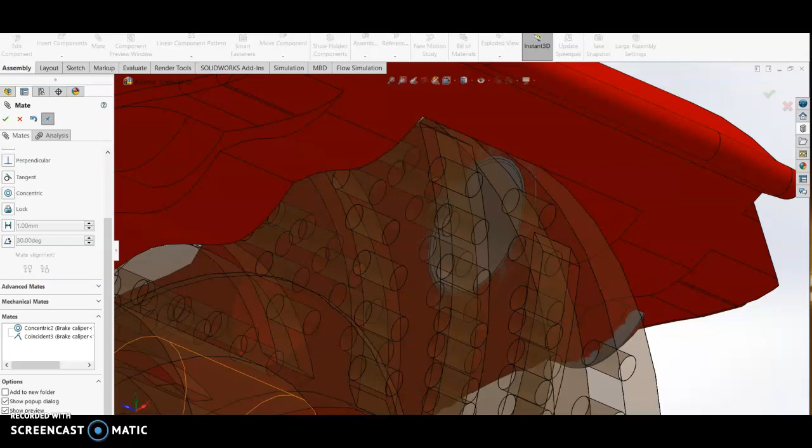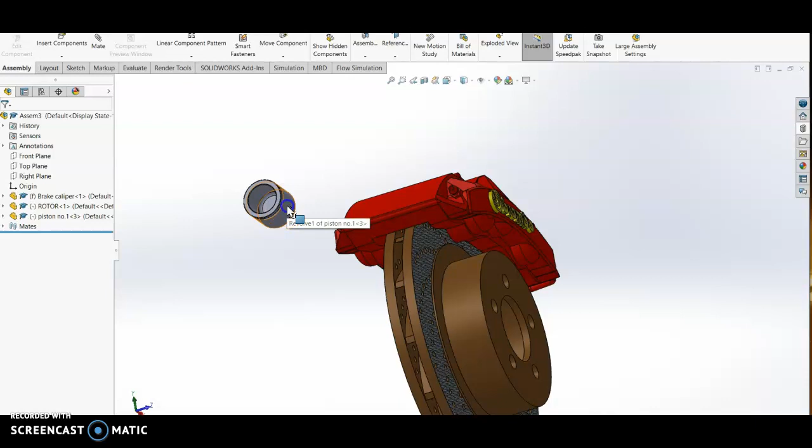We are going to install the piston into the caliper. So we have to insert the component. So we do it one by one. So first we do piston number 1, open. So piston number 1 is the biggest. Now we can duplicate this one by pressing Ctrl and then click, and then it's already duplicated.

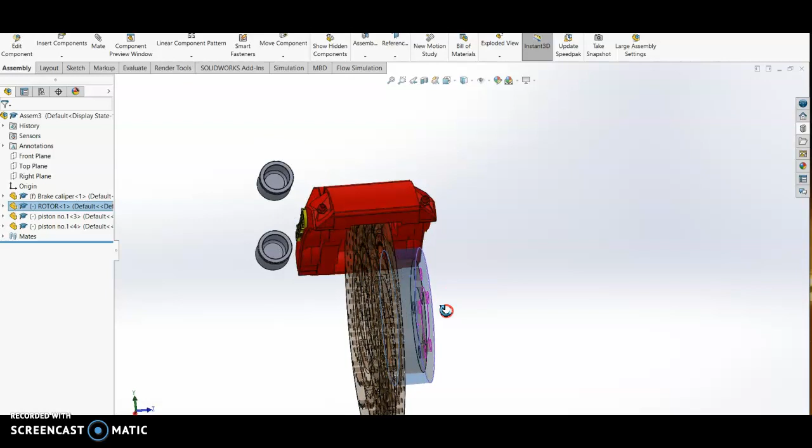So this is the front. So this is the big piston. In order for me to select the inside, I can make this one transparent or invisible. So I just click this side. So now it is invisible. So I can now select the base and then mate, and then to the cylinder.

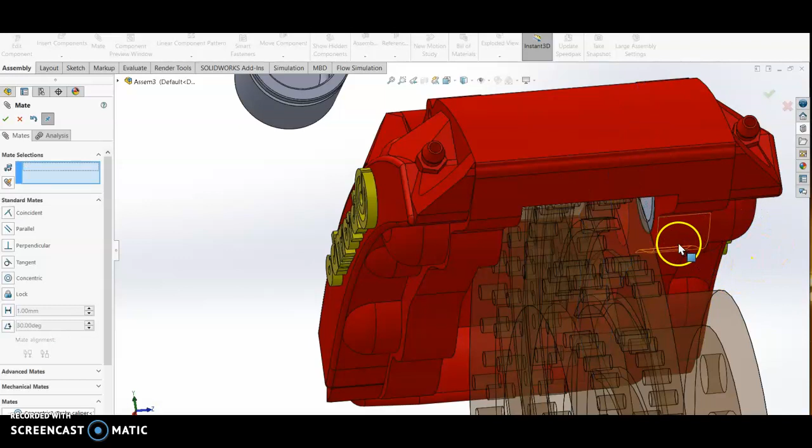So now see the position is correct, concentric. Okay, check. So now this base and this base will also be coincident. So check. So piston number 1 is in already, and then piston number 2, or still number 1 but on the other side. Okay, select, and then we make it concentric. So make sure that the position is correct.

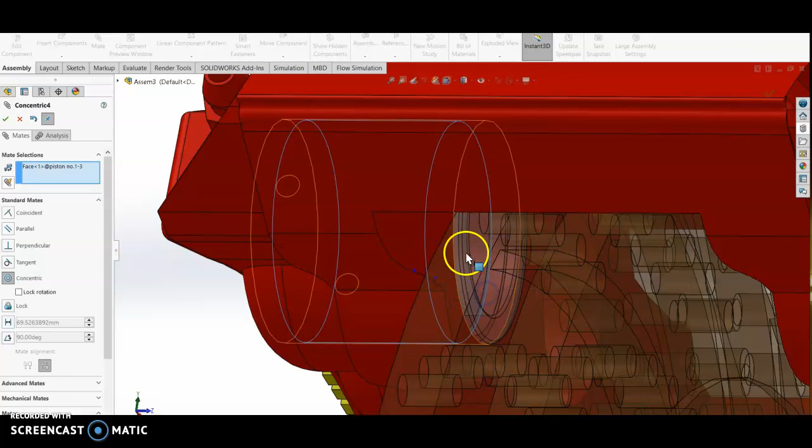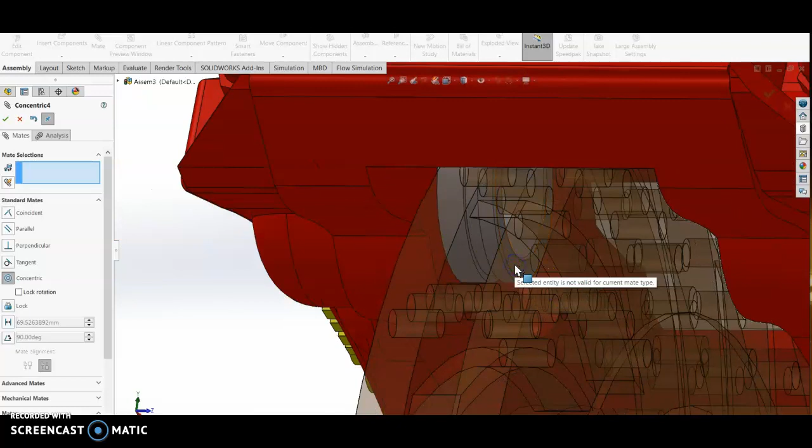So we have to, okay, concentric, and then check, clear. All right, let's see if, okay, so it's correct, the position is correct. Now we are going to make this base as well as this base of the piston. Oh yeah, we have to make it coincident. So now this base and this base. All right, then coincident, check.

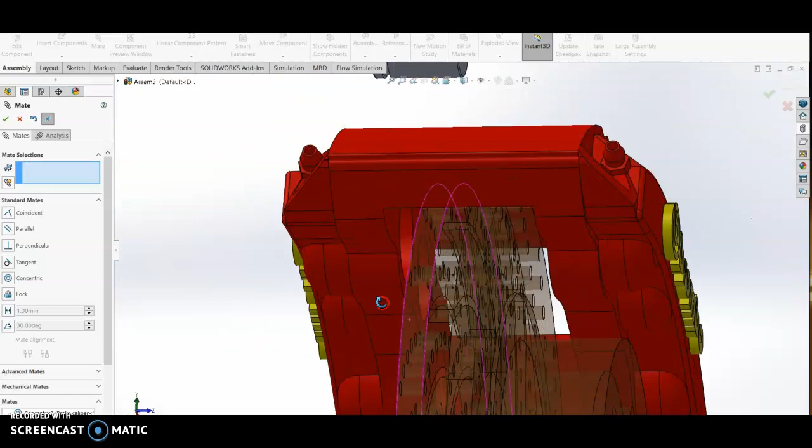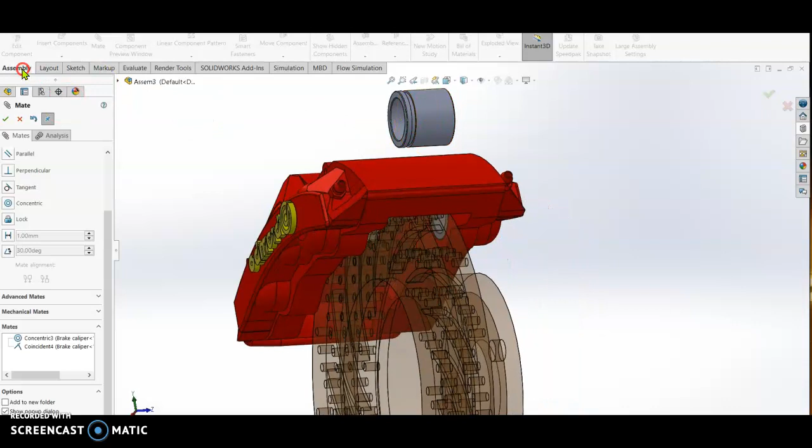Okay, so the piston, oh yeah, wrong. So this is wrong. We remove this one, delete. All right, we make first concentric. So we go, okay, this cylinder and this cylinder must be concentric. I put the other way around. All right, and then check.

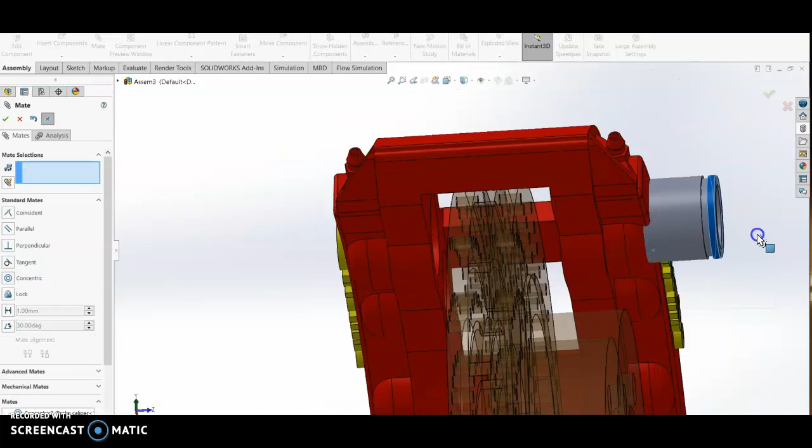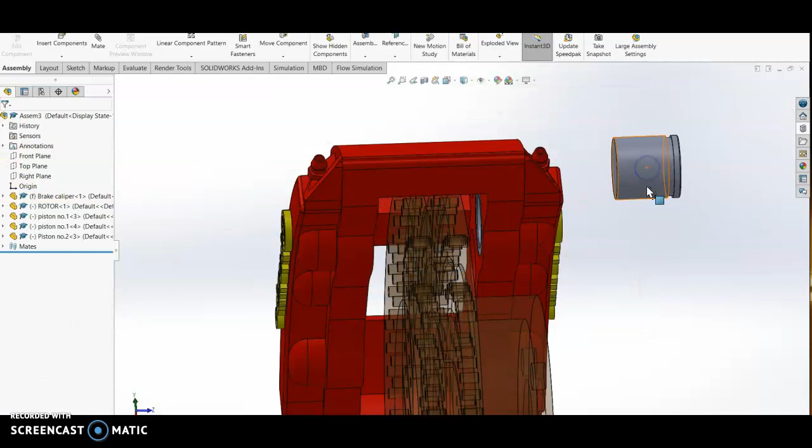Okay, so this is the piston, and then this base together with this base, then coincident, check. So the number 1 pistons are already in. Now let's insert the number 2 piston. Insert, browse number 2, open. So this is the 2. Then I control to duplicate, control and drag.

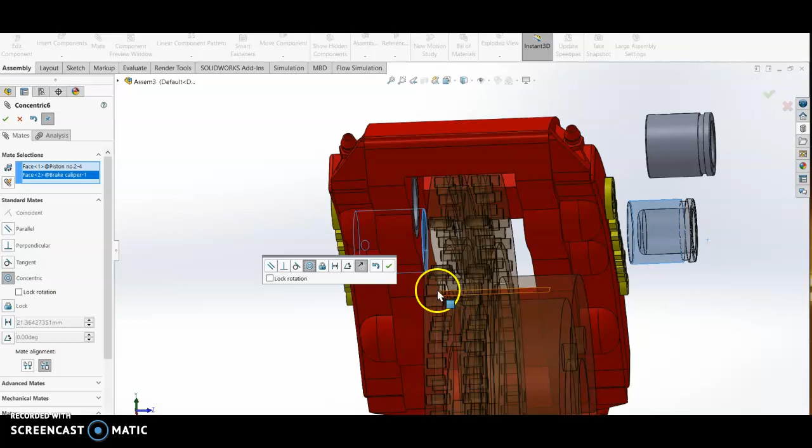So we put this one. So the same thing, we go mate, and then select the cylinder. Okay, and the cylinder, let them concentric. Okay, check, and then the base. Okay, and then the base, let them coincident, check.

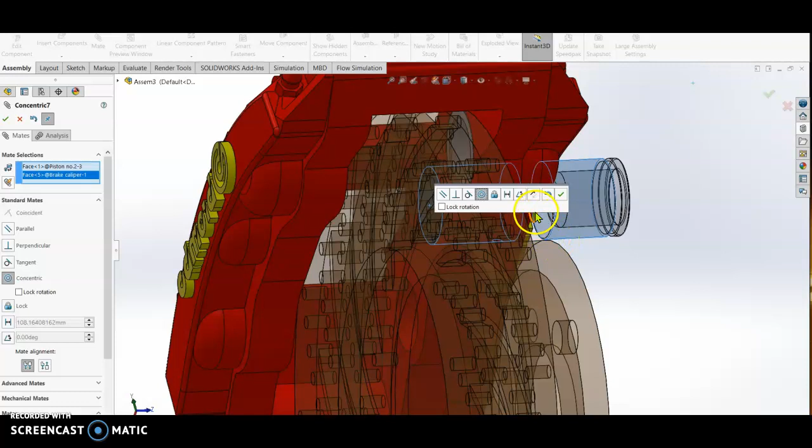So this one also, cylinder and the second cylinder there, let them concentric. I want to flip it, so we just flip. Okay, check, and then I want this base to be coincident with this base, and then check. Now we're done with the second piston.

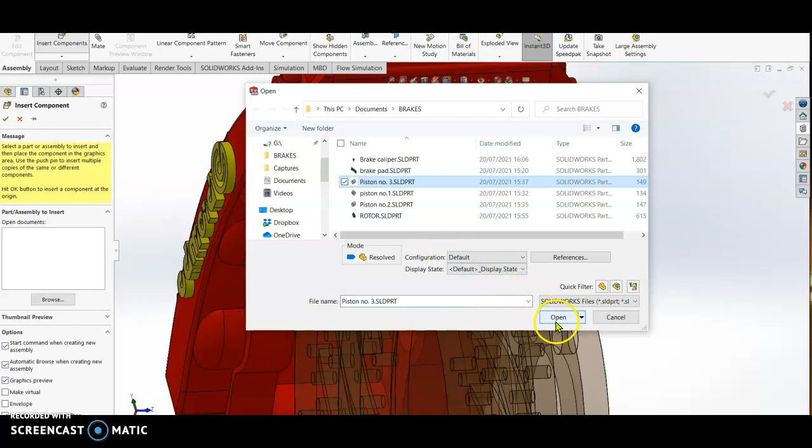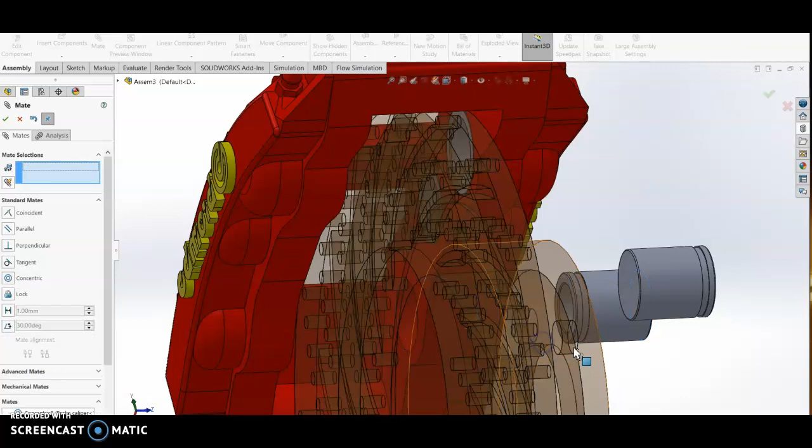We go to the last piston, insert, and then the third piston. Okay, open. So it's here. Press Ctrl and drag. Okay, now we have two. Then mate, we are going to mate this piston to the third cylinder. So concentric, I flip it. Alright, check. And then this base will mate to this base.

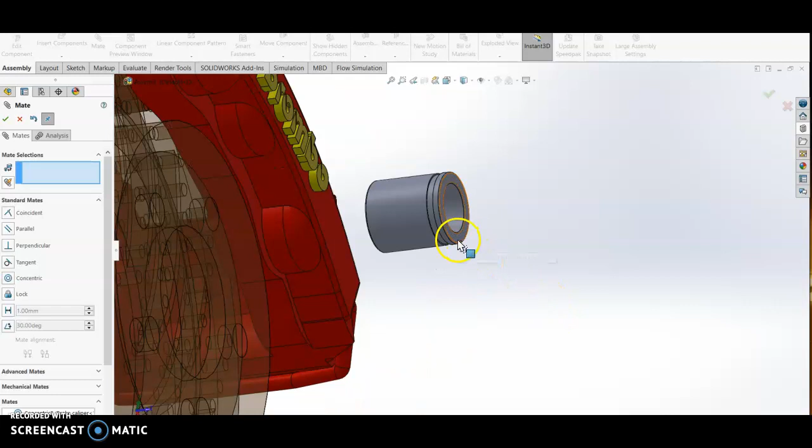Coincident, check. So the other one, cylinder. So I select the other cylinder. Alright, so concentric, check. And then the base, okay, coincident, check. So the assembly of the piston into the caliper is already completed.